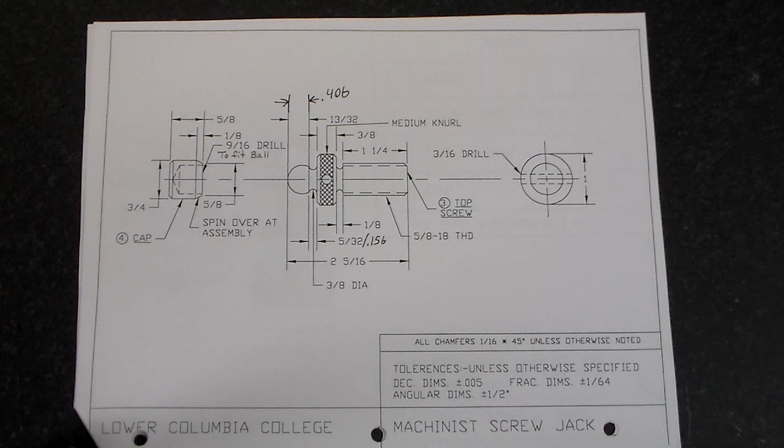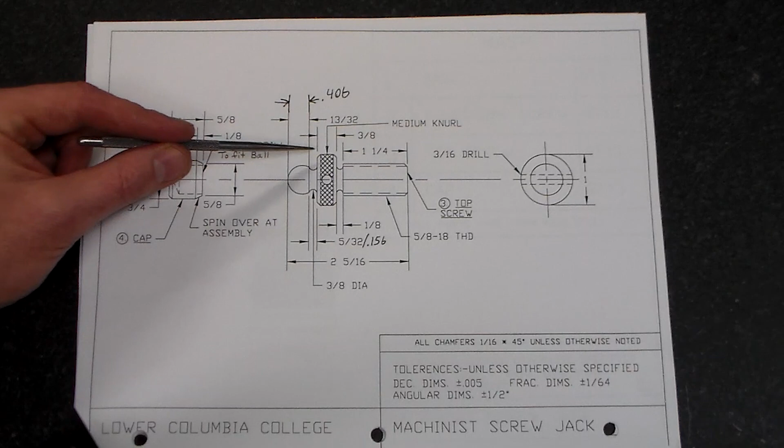All right, so now we're down to our top screw piece, and you can see here the part's overall length is 2 5/16, and the largest diameter of the knurled section here is dimensioned as 1 inch. So we're going to use 1 inch round stock to start with, and we're going to skim it by, again, about 15 thousandths before we knurl it in order to achieve a 1 inch diameter after it's knurled.

I went ahead and I converted these two fractions into decimals so I would know the distance on the finished part from the end to this shoulder right here. The reason I did that is because in our first op, we're going to be taking a part that is saw cut to 2 3/8, so an extra 32nd on each end of the part.

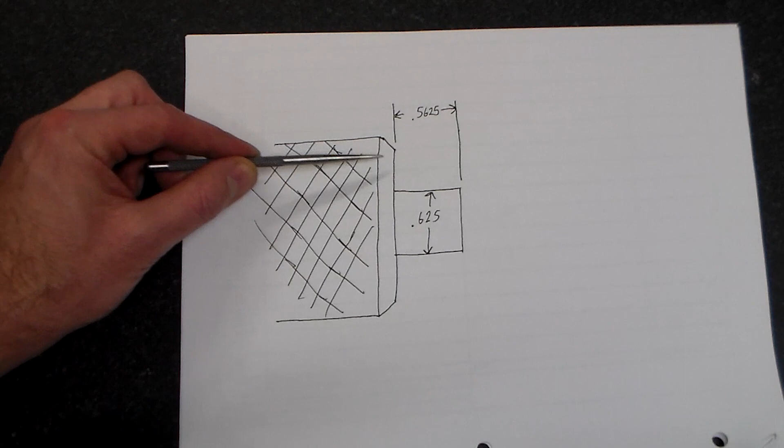And we're going to chuck that up, and then we're going to turn a 5/8 diameter back 9/16 of an inch, and then we're going to do our skim cut, do our knurl, and then do our chamfer. And that'll be our first op. You'll do that on both parts.

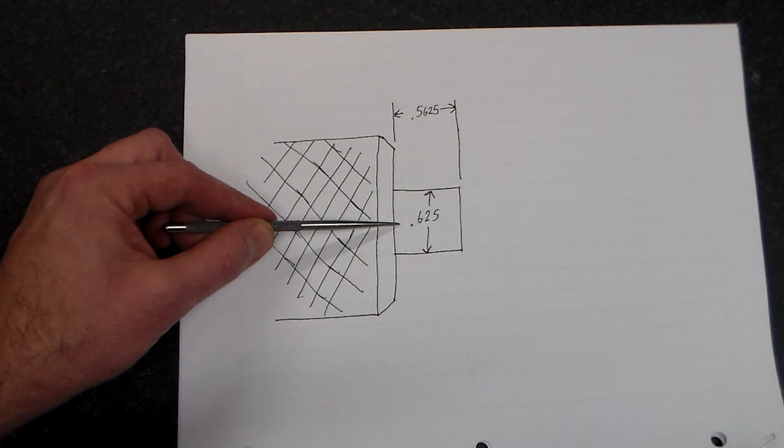On the second op, we will be chucking on the 5/8 diameter here, not worrying about the jaw marks that we may be putting in the part, because our finished spherical ball feature is actually 9/16, not 5/8 of an inch. So that'll be okay. But this surface right here will be bearing against the face of the jaws, so the knurling and the chamfer must be in place before we take the part out of our first chucking.

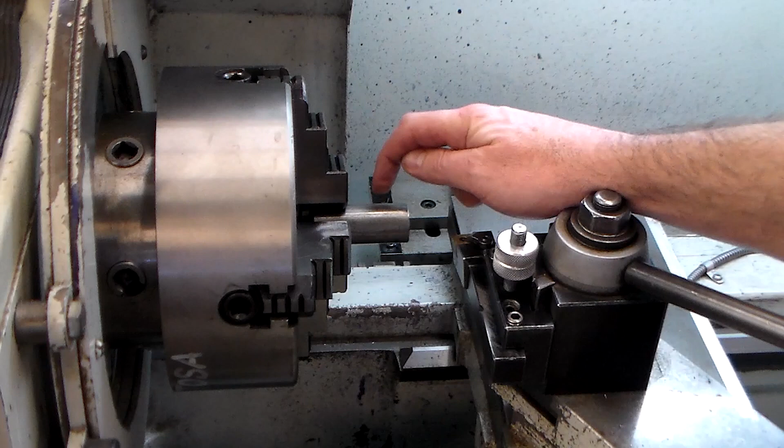Alright, I got the part, it's dialed in. Again, I cut it about a 1/16 over the finished length. So now I'm going to face the part, run down, make a mark to where I know where to stop my 0.985 diameter section that I'm going to turn in preparation for the knurling, and then I'll turn down what will eventually be my spherical ball feature that is 5/8 diameter and 9/16 long.

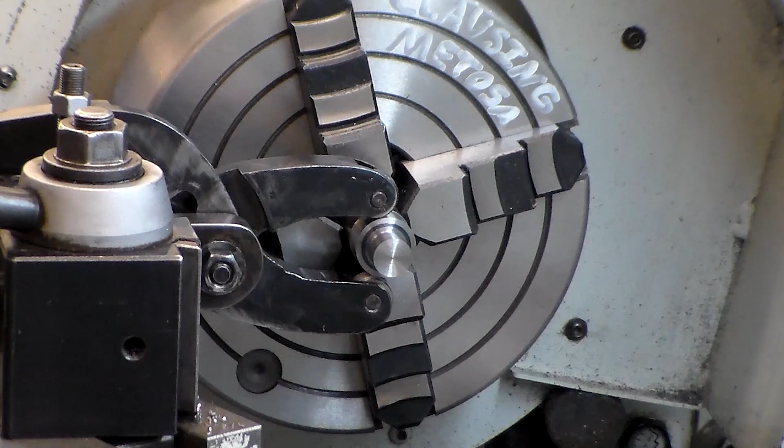I just kind of pinched it with my fingers, ran down the adjustment screw till it looks pretty good. We're gonna lubricate everything. Once again, all the components were cleaned in between now and the last time that I knurled. And I'm just going to hand feed to the left a short distance after I get a good knurl to develop. Looks good.

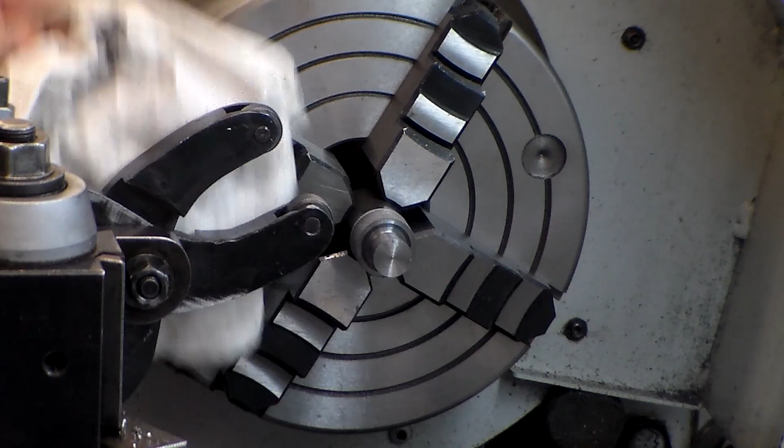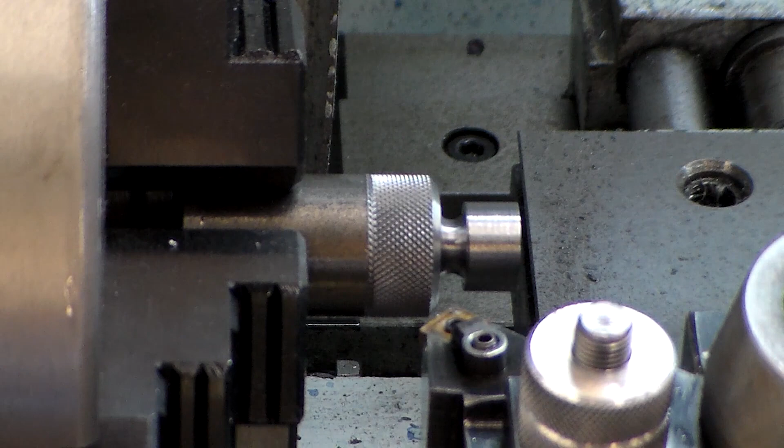All right, last step is going to be to chamfer that shoulder right here, and then we'll be ready for op 2. Ready for op 2.